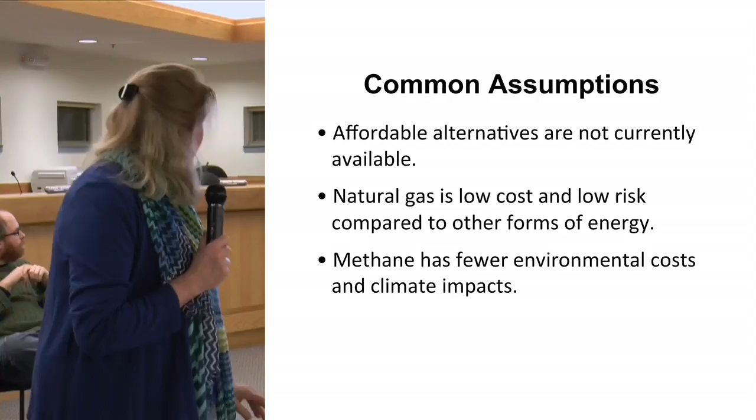We've noted a number of assumptions that tend to be made by the people who advocate in favor of the pipeline, and we've got them up here. They tend to believe that alternatives are not viable or affordable, available to people. And they note that methane has been the cheapest fossil fuel in recent years to buy, and they don't think it poses that big of a risk in terms of economic or environmental hazard. And they tend to believe that methane has lower environmental costs than other fossil fuels, especially coal.

So tonight we're going to mostly look at the first two assumptions, because our community hasn't had that much of an opportunity to learn about space heating alternatives, whereas, especially here in Dryden, you know all about the problems with fracking. So I'll turn it over to Bryce from here, and he'll walk us through his findings.

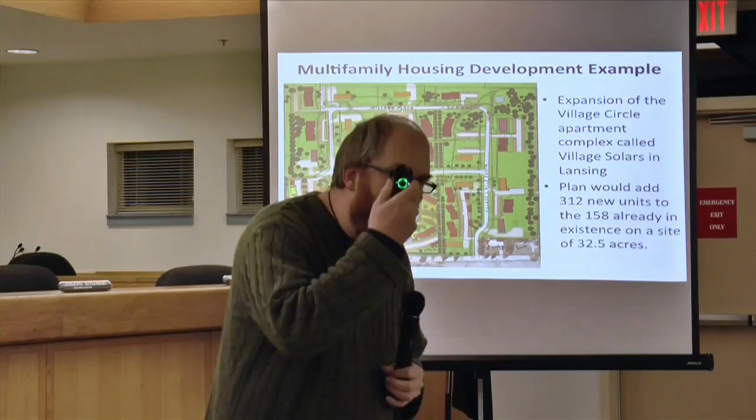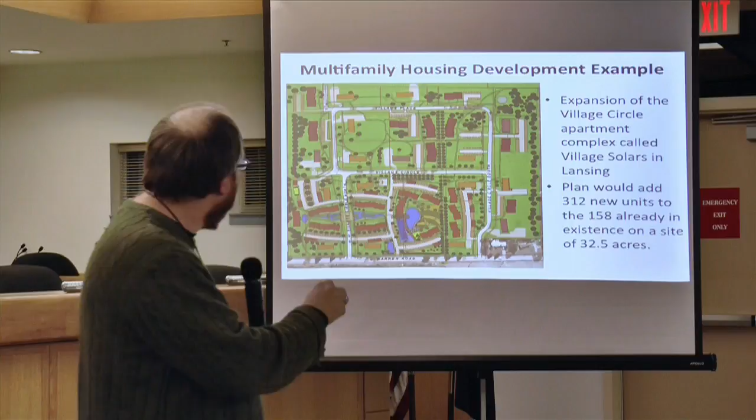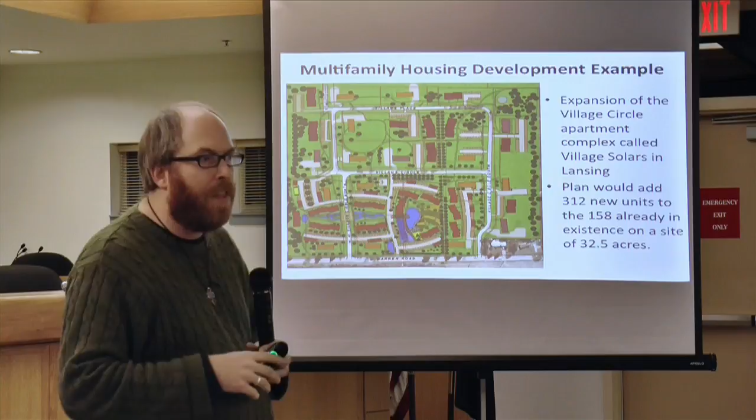So we took a project that was already in the pipeline: the Village Solars, an expansion of the Village Circle. The orange boxes are the existing housing units, the red boxes are what they're planning to add. This is a fairly large, fairly dense development: 312 new apartments to add to the 158 already there.

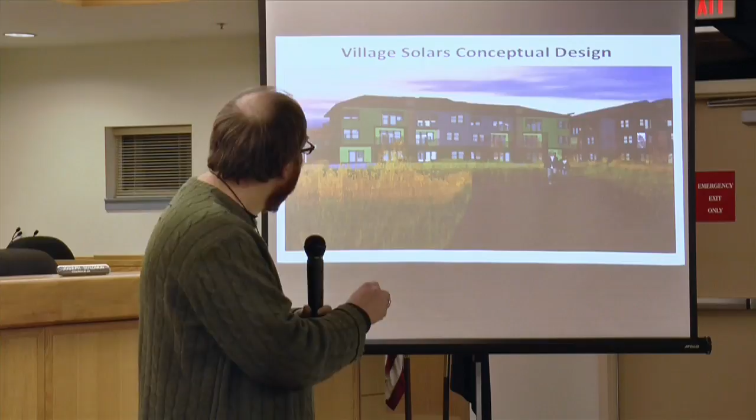We picked this one because there was enough information in the public domain that we could actually create the energy models and look at the options. Most of the units are constructed out of these little boxes: three stories tall, four units across, coming in blocks of 12 units repeated over and over to make the site. The analysis we're going to talk about tonight is really for one of these 12-unit blocks, then it's simply a whole bunch of those to make the site.

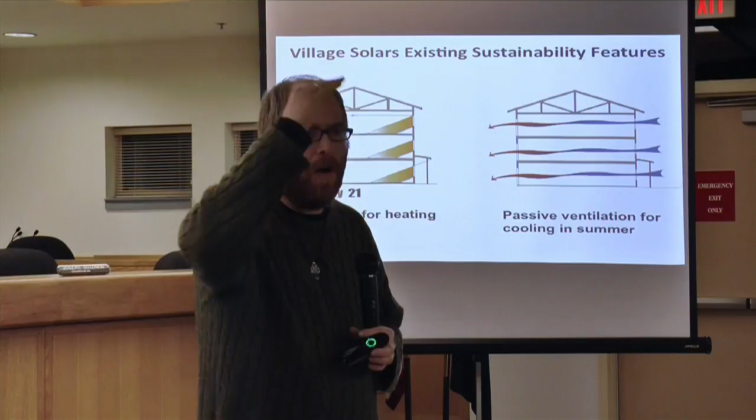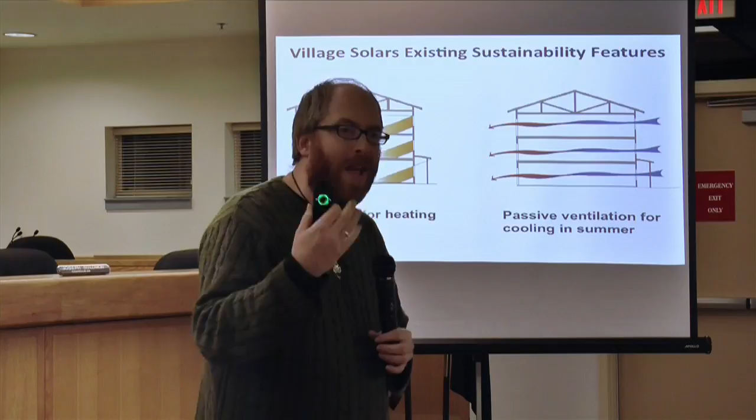It turns out Village Solars had already looked at a number of sustainability features, making it an interesting case study. Two in particular: they designed the buildings to take maximum use of solar heating in the wintertime, so they have solar gain in winter and awnings that block solar gain in summer. They also have glazing, or windows on the front and back, to create pass-through cooling in the summer. So it was already a design giving some thought to energy footprints.

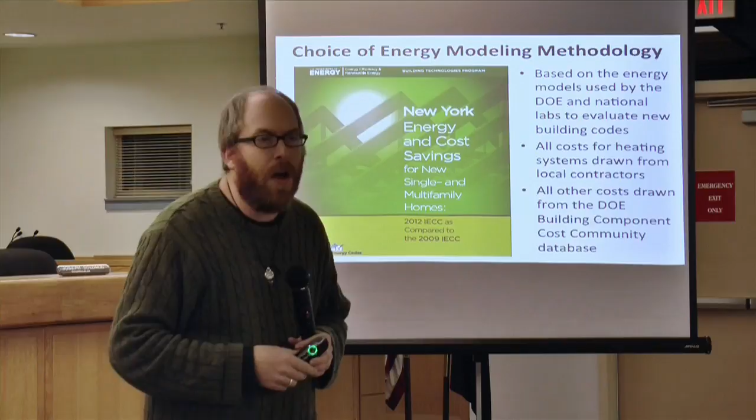What we wanted to look at was the options if, instead of building simply to code, you created a smarter building envelope and used one of the alternative-to-fossil-fuels heat pump technologies. To analyze this, we adopted a methodology that DOE uses whenever the energy code changes.

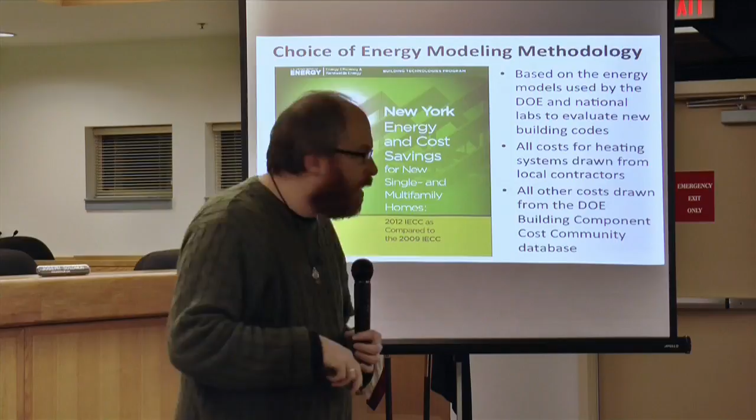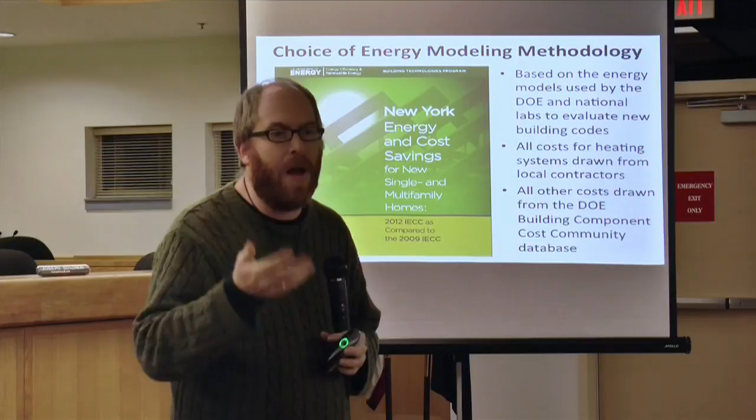This methodology is used all over the country, so it provides a nice base case. The other piece is that DOE maintains a cost database for all the technologies, so all the cost figures we used were verified common numbers. The only time we varied from the DOE numbers was for the actual heat pump installations, where we used local pricing since that can vary more greatly.

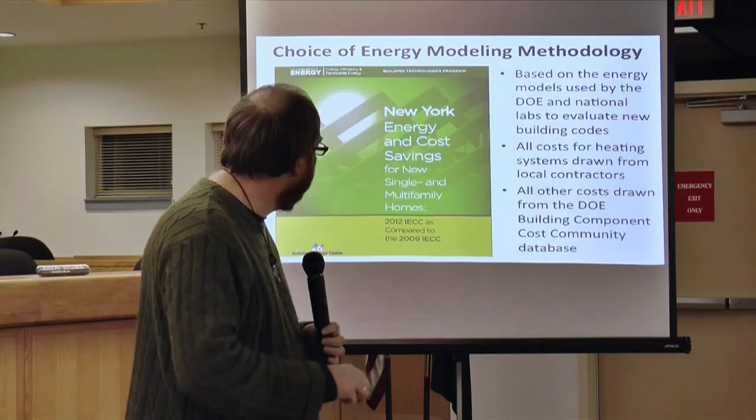We started out with the existing building code. At the time Village Solars was proposed, it was the 2009 building code, which is still what New York is using today. So this was our business as usual. When we started this work last fall, it looked like the 2012 building code was likely to be adopted, so we looked at that too.

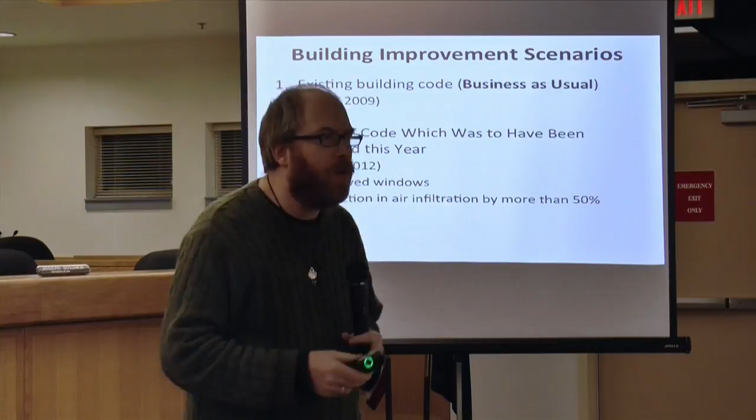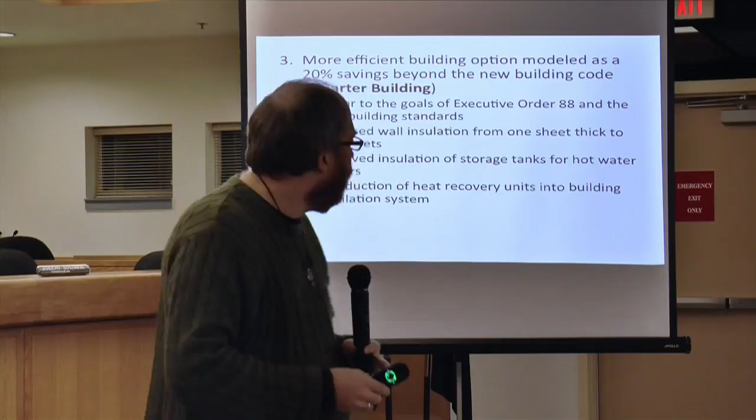But we also wanted to do better than simply building to the existing codes, so we looked at what was called a smarter energy building. As a goal, we took a 20% increase: a building that would be 20% more energy efficient than the 2012 energy code. The idea for 20% is that it's a commonly used number—for instance, LEED, the Green Building Certification, awards its first points for a 20% improvement off baseline.

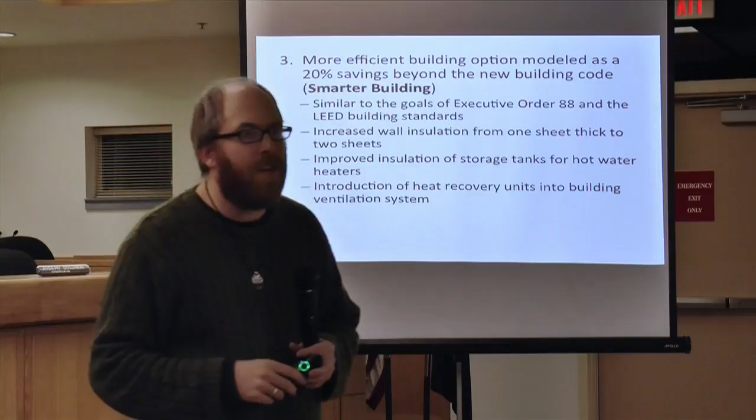Similarly, Executive Order 88 that Governor Cuomo issued called for a 20% reduction in energy use for all state-owned buildings. So 20% is our first number, and it turned out that to get that 20% we didn't have to adopt radical building technologies—it was simply three key changes. One was to double the thickness of the insulation.

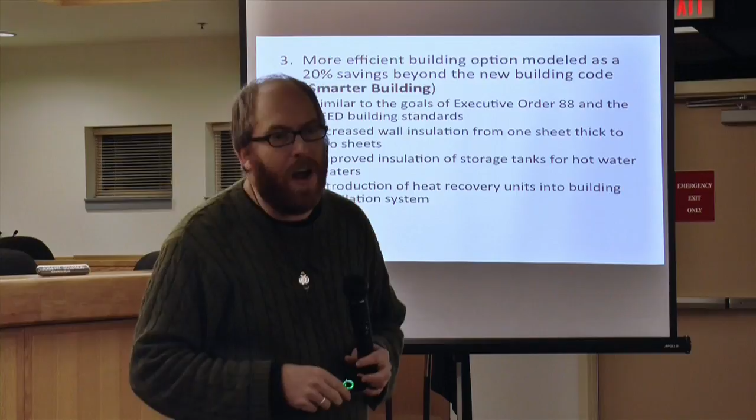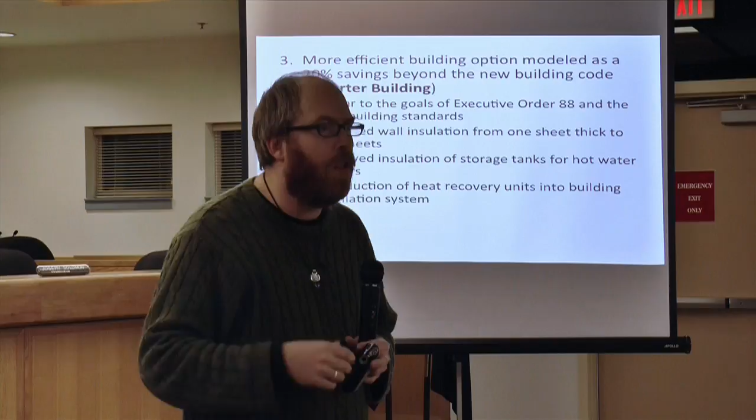So instead of one sheet of insulation on the outside, you put two sheets of insulation. The second improvement is to insulate your hot water tanks rather than leave them exposed. And the last one was to add heat recovery to the ventilation, which allows you to capture back some of the heat you'd otherwise lose when you vent the air out of your apartments.

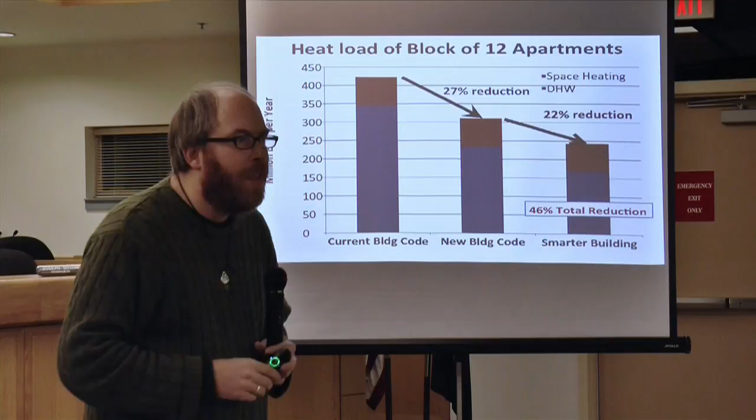So if we looked at the three models: business as usual, this was the current building code. If you were to build it to the 2012 code, you'd get about a 27% reduction, mostly through a tighter envelope. Our improvements off the building code, the smarter building, gave another 22% reduction. So all told, our building would use about half as much energy, a 46% reduction.

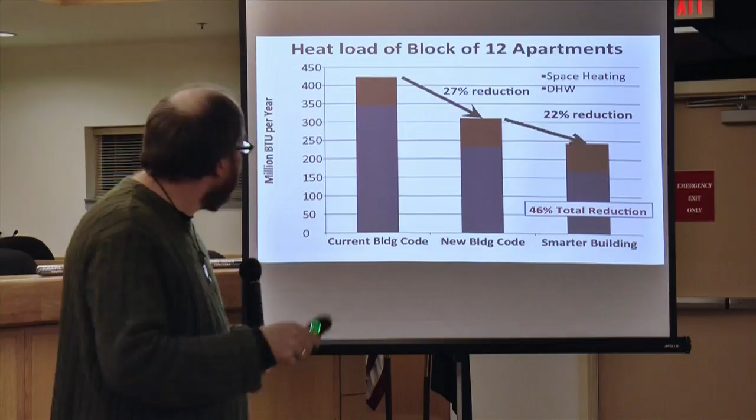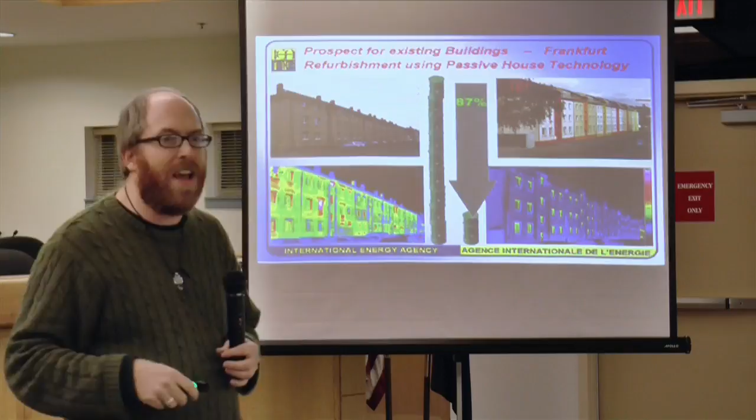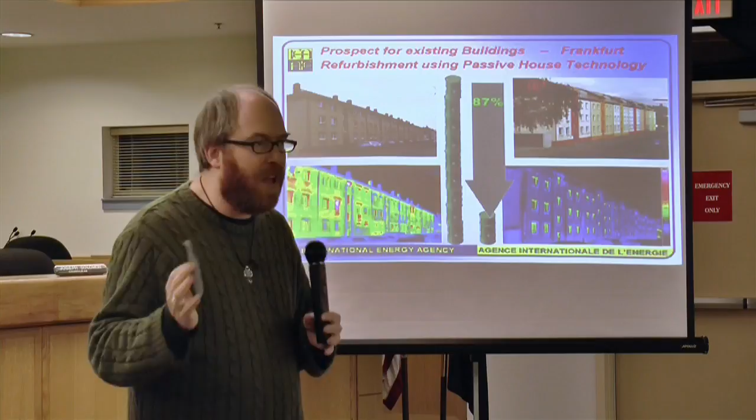So that's a big reduction, but to give you a sense that this isn't some radical best-possible building, I always love this slide. This is a retrofit out of Germany. These are infrared images before and after they fixed the envelope. After making these changes, they achieved an 87% reduction in the on-site energy use of the building. So our 46% is good, but this is not a passive house, not a really radical building design.

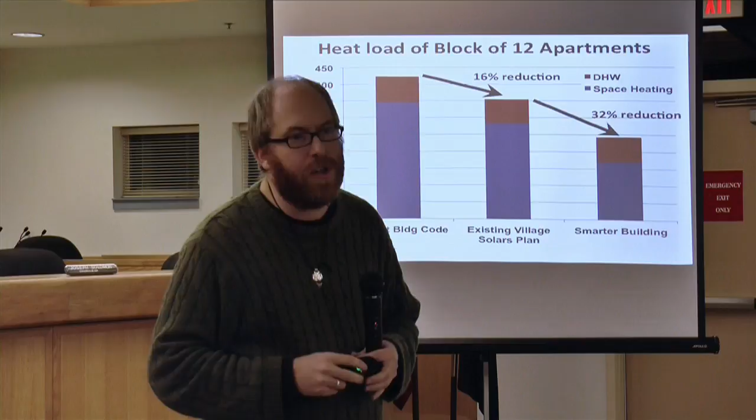Now, Village Solars, as I said, was already looking at some sustainability features and had an improved envelope, already better than the existing building code by about 16%. But our smarter building would still be about another third reduction from there. So there are still improvements we could recommend.

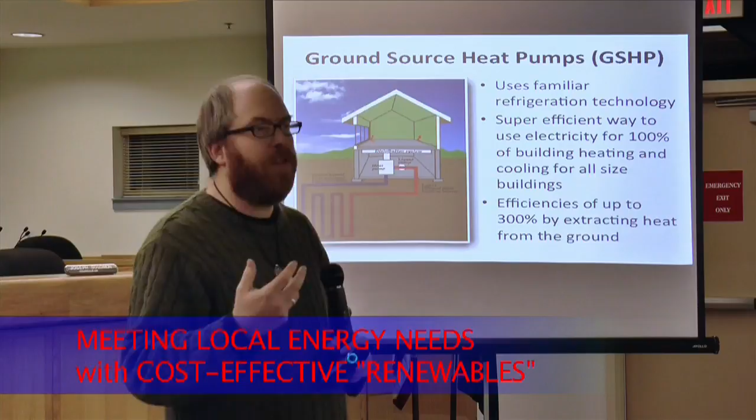In terms of the actual heating technologies, we focused on two that were very advanced and commercially available. The first is ground source heat pumps. These use the same refrigeration technology as a window air unit or your refrigerator at home, and allow you to extract 50-degree heat from the ground and uprate it to provide 100% of your building heat, really for any size building.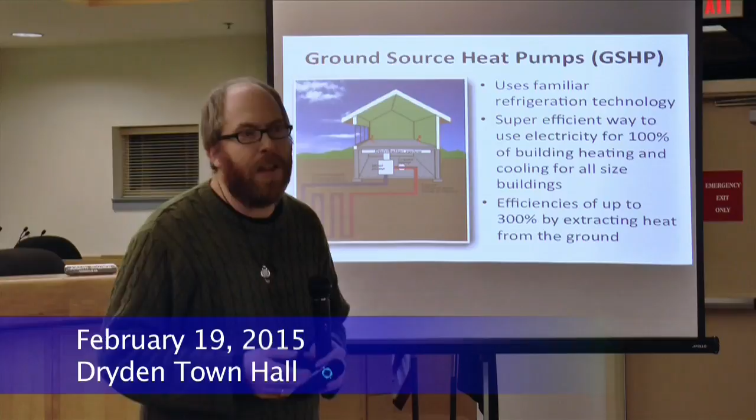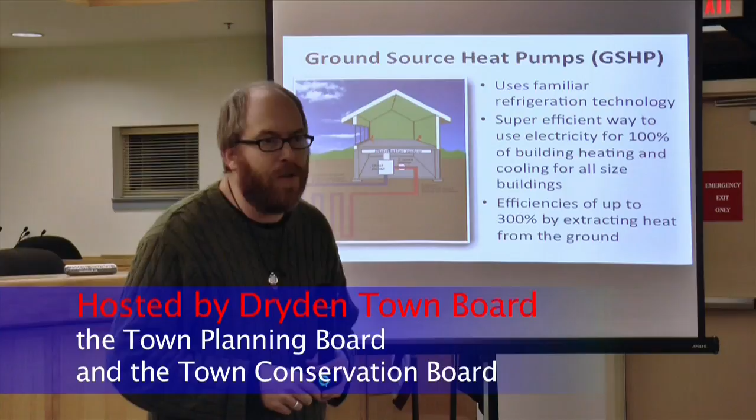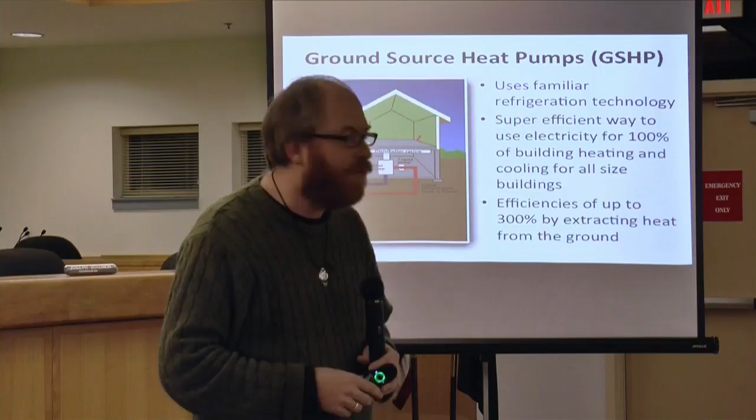For very large buildings or very large heat loads, economically you might start looking at other technologies like biomass, but geothermal can really heat any building—we'll show you a couple of very large buildings with geothermal in a bit. The last piece is, because you're using the ground to extract energy, for every unit of energy you put in to run the pumps and the heating system, your house gets three units of heat energy, so as an efficiency, we have 300% efficiency.

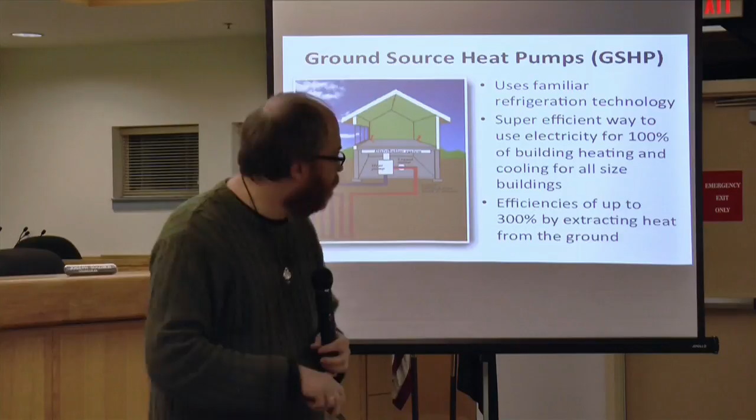So compare this to your natural gas furnace, which is around 95% efficient—95% of the energy you put in shows up. Here, 300% of the energy you put in shows up in your home, because the other energy is simply extracted free from the ground. The other technology we look at is air source heat pumps.

Air source heat pumps are very similar to ground source. They use the same refrigeration technology, only instead of extracting heat from 50-degree ground, you're extracting heat from the air in winter, and rejecting or dumping heat in the summer into that same hot air. So they're simply a little less efficient—instead of 300%, you have 200% efficiency.

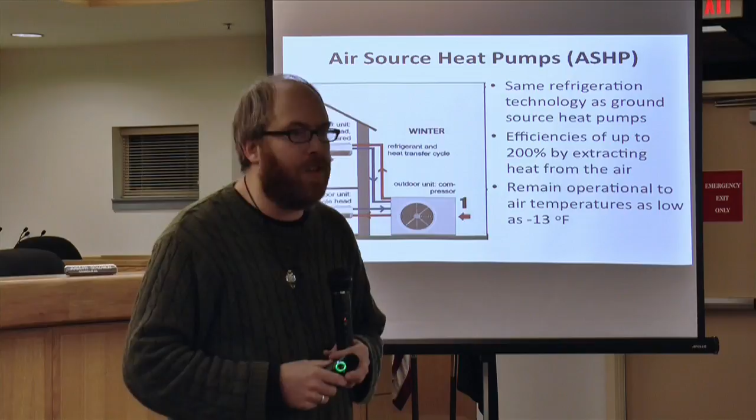And this technology has improved very dramatically. They now have models that can operate down to temperatures as low as -13, so they can really be used in our climate with quite a bit of certainty.

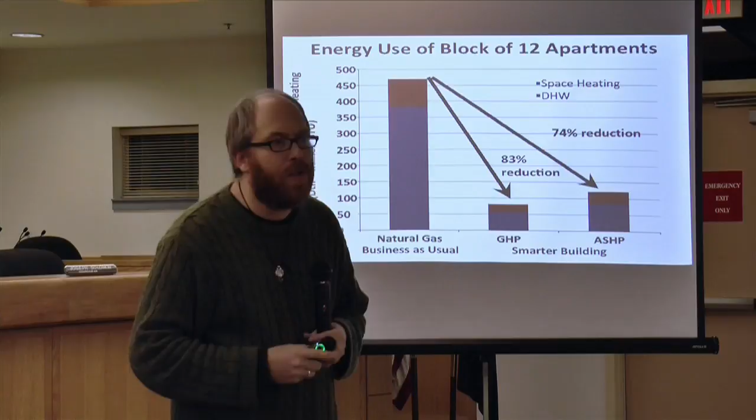When you combine those 200 or 300% efficiencies with our smarter building, here's where you get the really big reductions in overall on-site energy use. So here's our building as usual, using natural gas for heat. If you built it with the smarter envelope, the tighter building, and a heat pump, you can now see we eliminate 80% or 75% of the total energy. It's a huge change in on-site energy use.

And of course, this doesn't come for free. So the question now is, how does all the economics of this work out?

So what we wanted to look at was the upfront cost of building the smarter building and using the heat pump technologies. What does that look like as an investment? How much do you get when you look at the return from the energy savings?

Using those numbers from DOE for the cost of insulation and air sealing, and our cost for heat pumps, what we found is that for those 12 block unit apartments, it's about $50,000 to $60,000 of additional cost up front to build the smarter building. If you break that down per apartment, so you can compare it to things like granite countertops or other fancy bits you might put into an apartment, it's about $4,000 or $5,000 per unit additional cost.

So when we actually met with the architect who's designing this and talked with them about the cost of their building, what we found is it's about a 2.5% to 3% increase. It's a relatively modest increase, and we'll see that it's well below what we find and consistent with the national average.

But this investment is an investment. It's not simply a cost that you're going to bear. So the question for us was, what does it take to make this look attractive to a developer? How much do they have to recover in order to make this a return on their investment? So what we asked for was a 12% pre-tax rate of return.

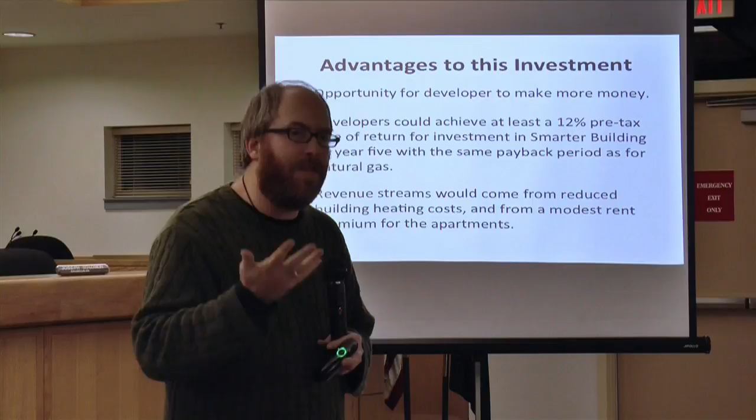Talking with developers, we saw that we would want to have this return in about 5 years, and they would want a cash flow positive after 6 months from the end of construction. So we built into our economics the question of meeting this type of return and meeting those cash flows.

And what we found was that it would require a relatively modest increase in the rent that you would charge. This is what we call our rent premium. Over the 30 years of the systems, you're going to save quite a bit of money on the energy costs. So you're saving $40,000 to $88,000 in energy costs.

So those energy savings are going to be part of this return. The remainder is a rent premium that you would pay to have these lower and more secure energy bills. And what we found is that the higher upfront cost of geothermal, because you have to dig the trench to put the ground loops in or drill the wells, ground source heat pumps cost a little more up front, but they're more efficient, so they have more savings over time.

And in the end, there really isn't a strong economic argument for one or the other. Both of them came out with a rent premium around $47. These apartments that we modeled, the Village Solars, are meant to be market rate apartments, so they were going to be rented for about $1,000 a month, and so this represents about a 4.5% increase in the overall rents.

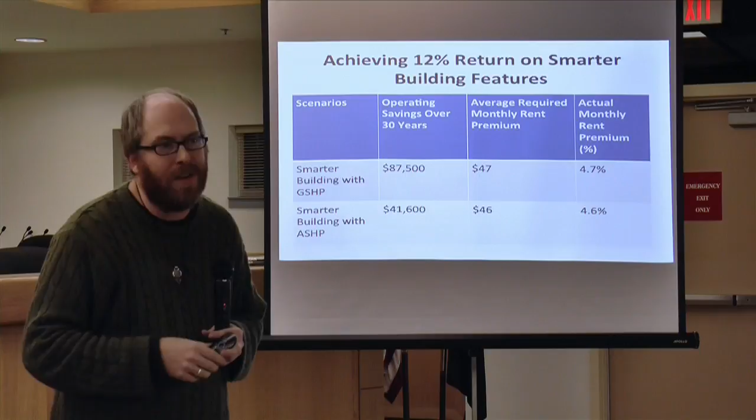Now this, of course, doesn't have to be the way that you work this, right? These were designed with existing structures that you were modifying the design, and they were meant to be market rate. When you want to look at affordable housing, there are examples in our area that have built more efficient buildings for less money than we're actually talking about the base price for these buildings. The base square foot cost is actually higher than what some green buildings have come in our area.

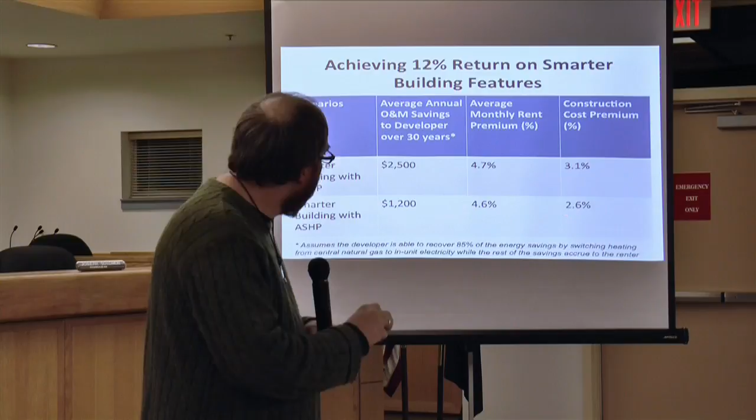So this was our totals. We had about a 4.5% increase in the rent, coming from about a 2.5% to 3% increase in the overall construction costs. The remainder is from the financing of this. And so the question was, could we expect developers to be able to recover these costs?

So the DOE has studied these types of buildings around the country, and far too much text they put on their slide that I copied here. But the numbers you want to focus on are the rent premiums, higher rental rates. And if you notice, the smallest rent premiums they found were around 7% to 8%. Remember, we would only need 4%, 4.5% to recover our costs.

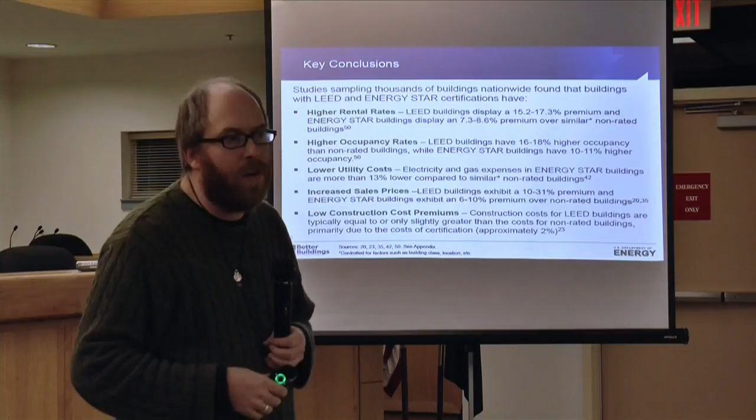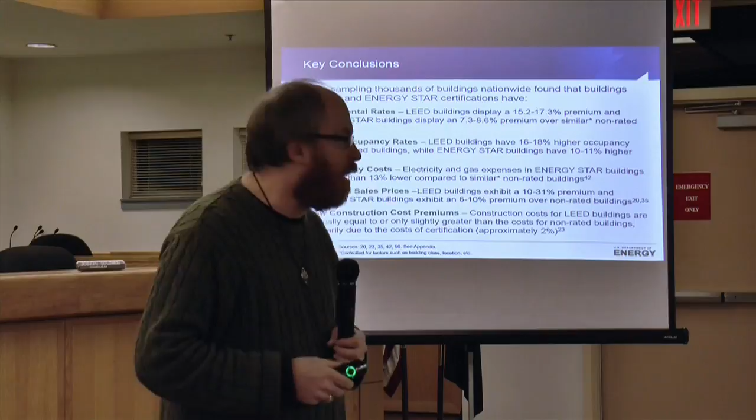They were finding LEED buildings commanding a premium of 15% or more. So these rent premiums are quite reasonable compared to what we see. And those rent premiums come from higher occupancies, lower utility costs, a faster and higher sale price. And then the last piece here is construction costs. They generally find an increase of around 2%, and that's consistent with what we found for our buildings, 2.5% to 3% increases.

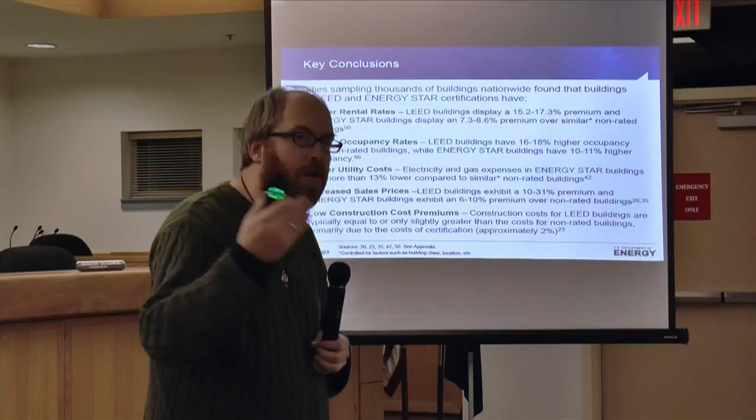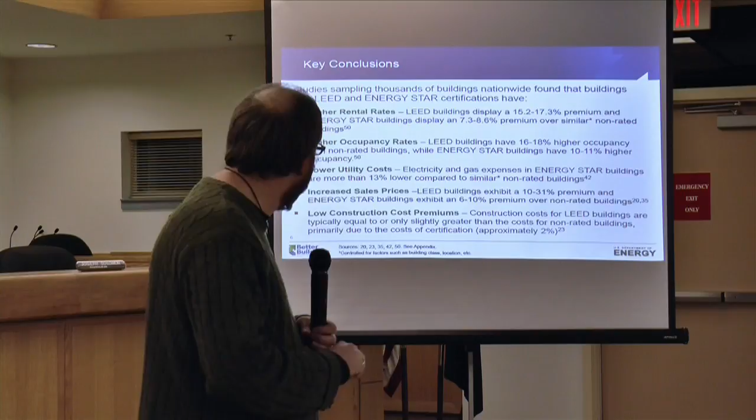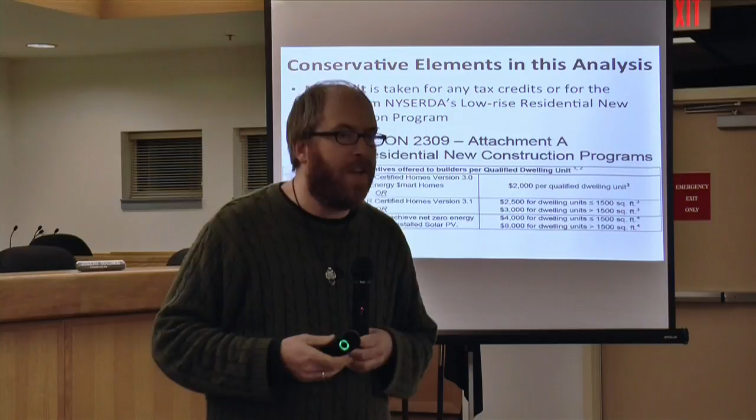So from the standpoint of a developer, this looks pretty good, right? There's a pretty strong economic argument that you could build the smarter building with the electric heat, the high-efficient electric heat, rather than the natural gas fossil fuel infrastructure, and you could make a return on this investment, a fairly healthy return. And in this, we have attempted to be as conservative as possible, keeping as many of the assumptions on our side as possible, so any changes would only make this look better.

So I'm going to hand this off to Melissa. She's going to walk you through some of those pieces and talk about where we've been fairly conservative in our analysis.

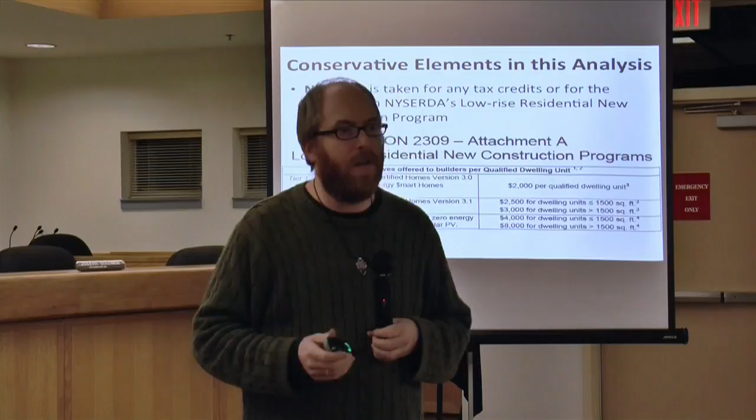Hey, thank you, Bryce. So just to continue and pick up where Bryce left off, this is a conservative analysis. The first thing that we show here is that we're not taking advantage of any tax credits.

Currently there is a very nice tax credit for building these type of smarter buildings. It's NYSERDA's low-rise residential new construction program. You can see, if I point at it, this top section here, it's about $2,000 per unit.

That they're willing to give developers for constructing these type of smarter apartments. So if you remember from the previous slide, to actually build the smarter building with a ground source or air source heat pump, we're talking about an additional cost of $4,000 to $5,000. If the developer wants to take advantage of this tax credit, immediately $2,000 of that goes away. So those economics in terms of developer profitability, that's without this involved at all.

This program's in place currently through the end of 2015. NYSERDA expects to continue it, extend it, and it's been successful and it's something they want to continue to promote. The other piece here is the third tier. There's also, they actually increase the incentive that you get if you do solar.

And that's why I'm up here to talk about solar. So solar PV, when it comes in the mix here, it actually increases that tax credit from $2,000 per apartment to $4,000 per apartment. And again, the additional cost was $4,000 to $5,000, so we're almost offsetting 100% of the developer's additional cost.

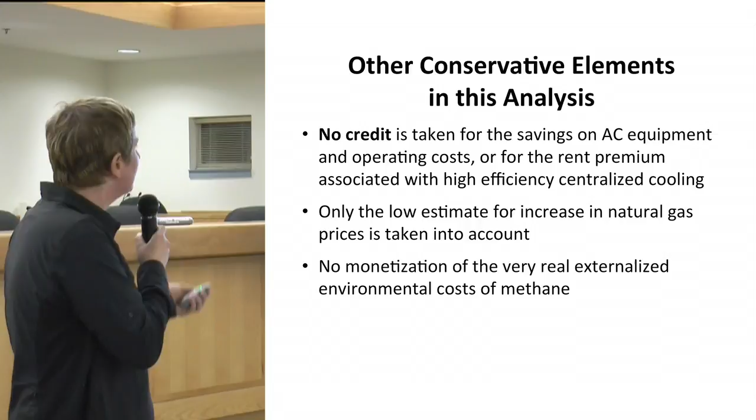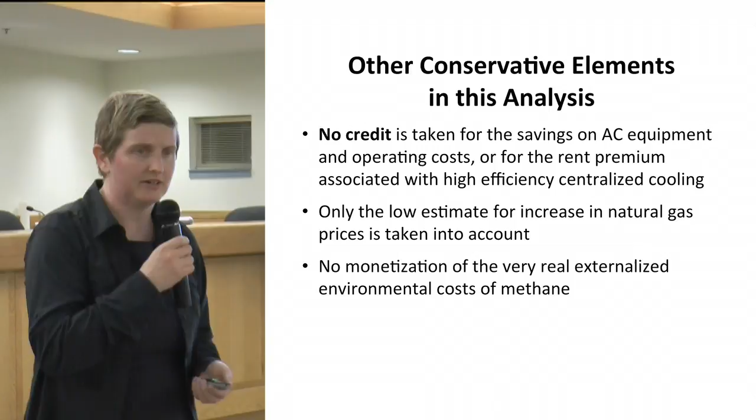We've also used very low base case costs for natural gas in the models he just showed. If we see higher prices, which we'll talk about later, that would only further improve the picture. And of course, many of you know about the fracking conversation over almost the last half decade.

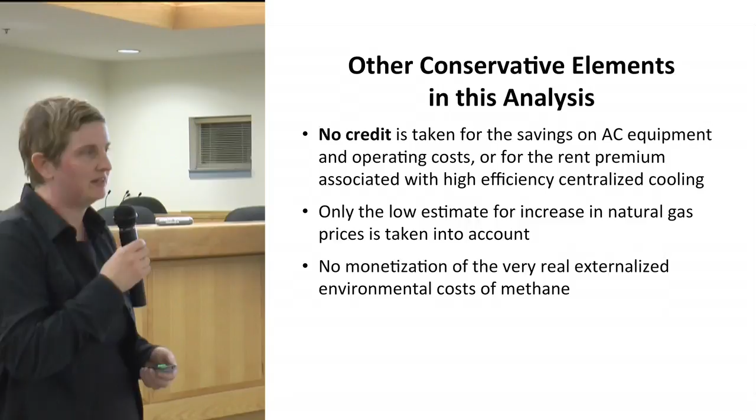Often we're here to talk about climate commitments, but we haven't put a dollar figure on that for this developer example and the economics we've shown. The real externalities that we're not currently monetizing do have a cost, and when you factor that in, it's icing on the cake, making this case even more compelling.

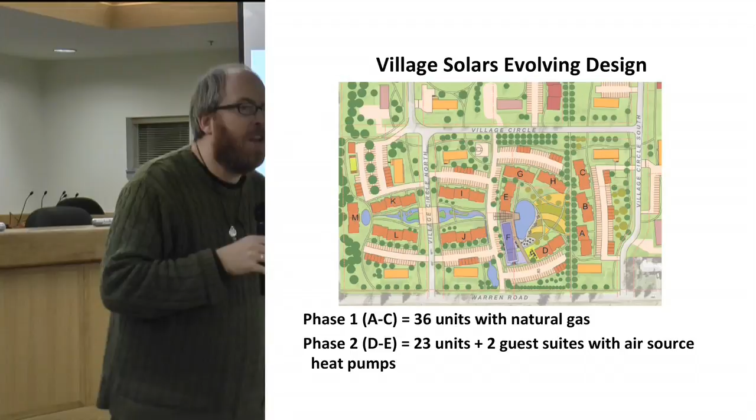As Linda mentioned at the beginning, when we ran through the numbers we think it's a fairly compelling case. But we're the eggheads, right? So you know it actually makes sense when the business people start putting the money down.

We did not pick Village Solars because of this, but as we worked with them, we found they had independently decided to switch at least phase 2 of their development to air source heat pumps. Phase 1, the first three buildings A, B, and C, are already under construction, nearly ready for occupation, and those will use natural gas.

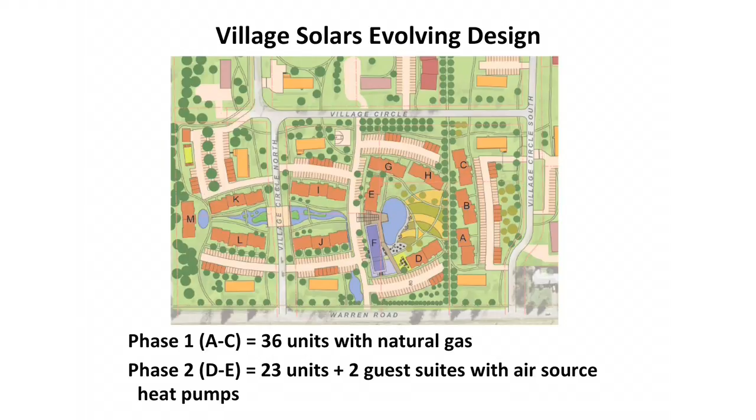Buildings D and E here are phase 2, and pending final work with NYSEG, they are going to switch these to air source heat pumps. The decision on the rest of the development is still being worked on.

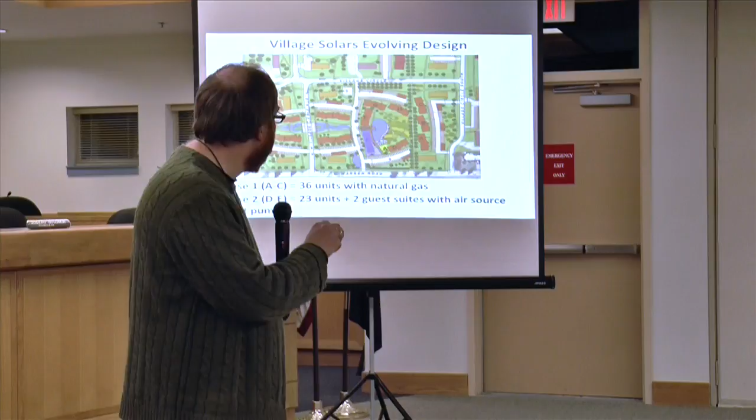Their decision came about because the developer had talked with other developers who used air source heat pumps and were very happy with them, and found that the economic arguments we're making here made sense for them too. This is actually going to be a remarkable case study, with buildings built identical to one another, some with gas and some with heat pumps, letting us see this work out in a really unique comparison.

Now, how this ties into the pipeline goes beyond just this one facility. Village Solars is a big user, and if all 312 apartments were built with natural gas, that's a lot of gas required. If they switch phases 2 through 5 away from natural gas to air source or ground source heat pumps, they'd displace the need for an awful lot of gas supply—enough to provide about 100,000 square feet of commercial space.

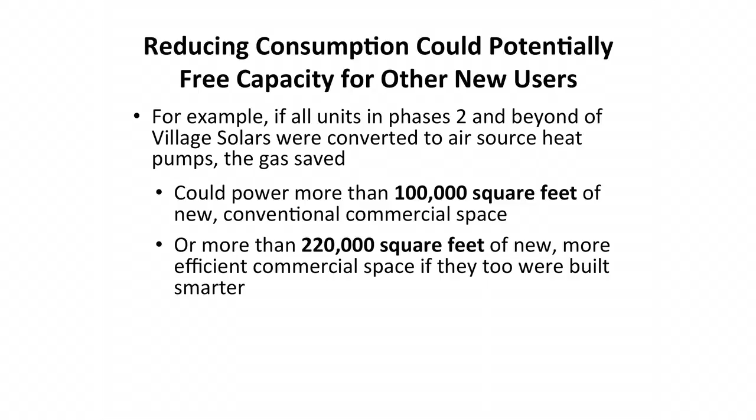If you built the commercial space better, with a smarter envelope, you'd be able to build almost 220,000 square feet of commercial space and power it with natural gas. This gives us a way where if big users make this switch and reduce increased demand for natural gas, it becomes a question of whether we really need to increase supply, or whether we can pull enough demand off the existing supply so users who really do need natural gas for high heat or process heat could still have access to it.

But we're taking natural gas and turning it to electricity, so the question is, do we have enough electricity? It turns out it's not a big amount. For all of those numbers, 2 through 5, if they build all of them with air source heat pumps, its peak demand would be around 135 kilowatts.

For those who don't live and breathe energy numbers, that's 0.2% of the average electric load in Tompkins County. And it turns out it's actually better than that, because our system is designed to meet the peak demand, and peak demand here comes in the summer still, and our new demand is adding winter demand.

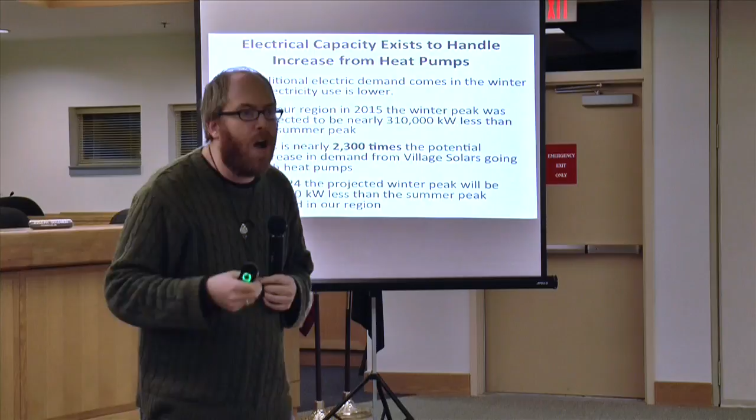So if you look at 2015 here, there's 310,000 kilowatts of excess capacity in our region because it's designed to meet the summer load and not the winter load. So that's 2,300 times what we need for the Village Solars project. It's a lot of excess capacity that our system already has. The transmission system needs to be considered, but we're not short of capacity.

And if you look to 2024, this is with the assumption that the Cayuga plant was shut down. These numbers are all built around the existing assumption that in 2017 Cayuga goes down and is not repowered. The actual winter excess capacity will still increase in our region. They project it to be 375,000. So there is quite a bit of excess winter capacity that we could tap into with these kind of technologies.

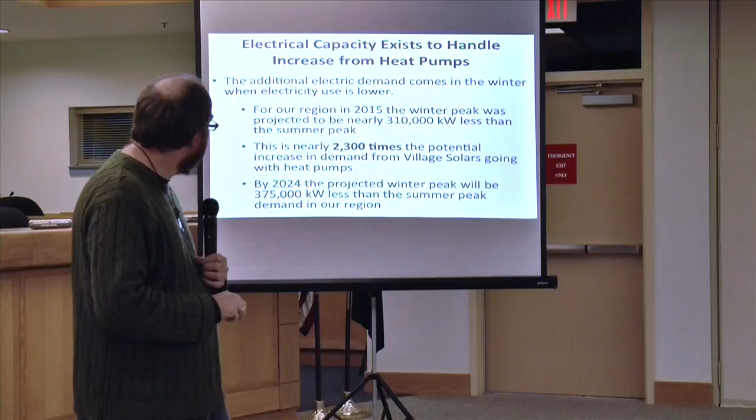And because we're talking about now not having a single contractor come in and put in natural gas, but we're talking about window companies and insulation companies and HVAC companies, all of that extra economic activity is going to mean more money in the local economy, and it's going to mean more jobs. So again, about $135,000 to $160,000 of extra money, and this is actually what would stay in our community.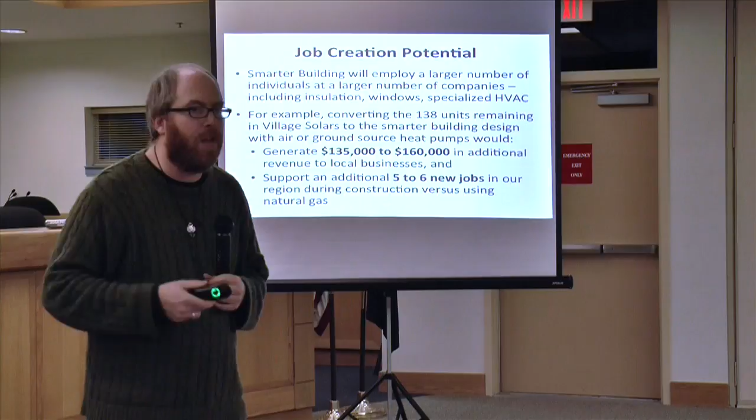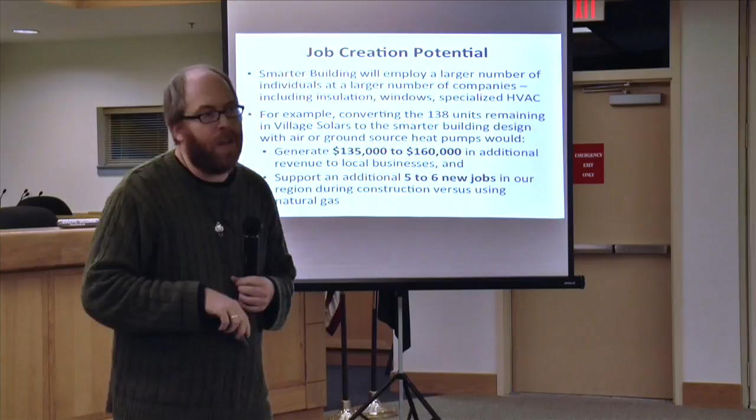So I've already taken into account the fact that if you buy a heat pump from a big national company, I'm not counting those dollars. Those are leaving our community. These are the ones that would stay behind, and it would add up to about 5 to 6 new jobs just from that one Village Solars project. So it is good for economic development.

So as Melissa mentioned, you can look at many of the same technologies for single-family homes, and again, the numbers will come out very similar. It's just now on a different scale. So if you were to build a new single-family home and your choice was, again, natural gas or building smarter with an air or ground source heat pump, there is an upfront cost.

For a home, it would be around $13,000 to $17,000 to build the home better. And if you financed that in your mortgage, it would work out to about $1 extra a month, or $14 extra a month.

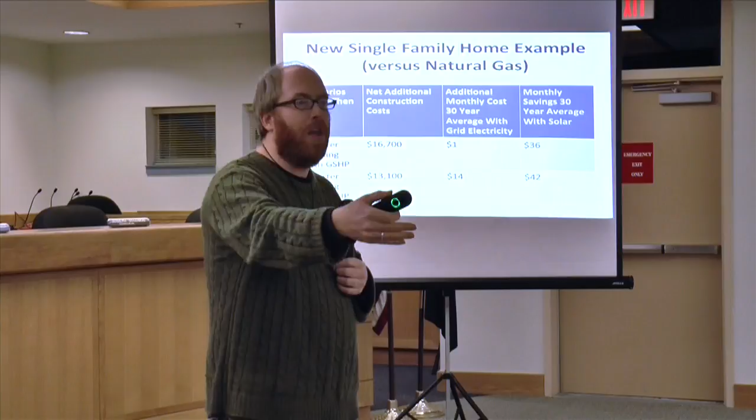But because of the advantages of solar, the fact that you can lock in that price today, make a loan for 10 years, and then the rest of the life of those solar panels, they're producing free electricity, you actually would end up saving money if you switched to solar. You'd save about $36 to $40 a month.

Similarly, if you're on propane now, and your choice was, do I convert to natural gas, or do I do insulation and air sealing and make a heat pump, the choice there, everybody's going to save you money. So switching to air and ground source heat pumps is going to cost you less than heating with propane. Switching to natural gas is going to cost you less. So the investment here would save you about $15 to $25 if you bought grid electricity.

And you'd save $60 to $75 if you switched and also installed solar at the same time. These are the average savings over the lifetime of the system. So you actually would end up saving a larger amount of money switching to a more efficient home with the air and ground source heat pump and solar. Not only would you now be fully net zero, you would have no fossil fuel infrastructure that you're using for building heating, but you would also save more than if you converted to natural gas.

So we'll just mention very briefly some commercial developments. These same technologies will work for us. Same basic technologies apply when we talk about commercial spaces. They're simply more varied, and therefore each case study would be a little bit different, whether it's a retail space, a hotel, or some other type of commercial space.

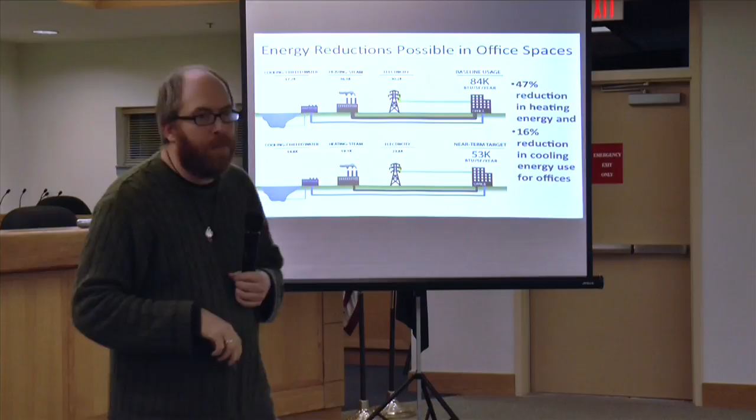So this is just cribbed from Cornell's study of their buildings. Office spaces, just like homes, can be built with better envelopes. And they found about the same types of reductions that they were hoping to achieve as we found for the multifamily, around 47% reductions.

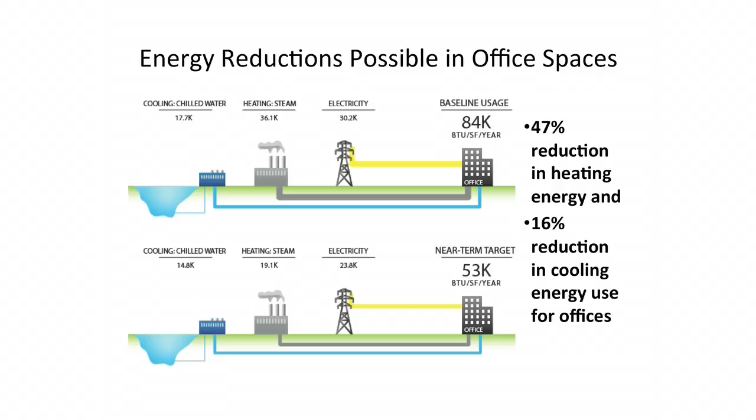Lots of buildings in the area have made this choice. Being from Cortland, I'm going to put the Cortland one up here first. This is the Professional Studies building, opened a few years back. The new part of the building here is powered by a heat pump. It's connected to an old building.

And this is a neat example of a really extensive retrofit. The old building it's attached to was not a high-efficiency building. It was, in fact, the Cortland Overhead Door Company at one point. It was where we stored our tractors after that. So this is a building that has had many lives and is now part of one of our newest spaces.

The well field, the geothermal, has 40 wells drilled about 350 feet into the ground. There's lots of space around these buildings because there's lots of parking lots. They just simply drilled it under the parking lot and repaved over the top of it.

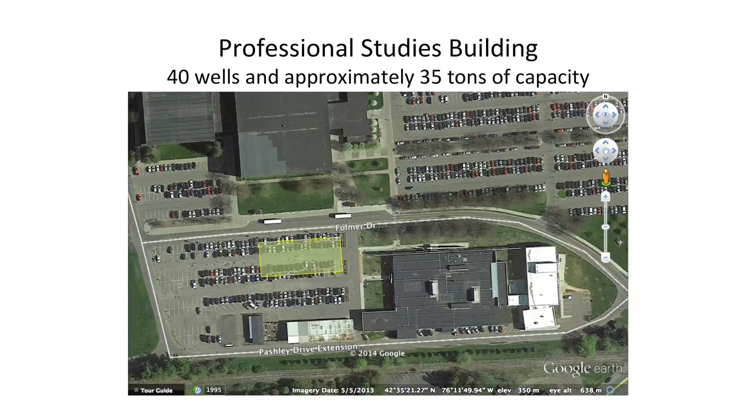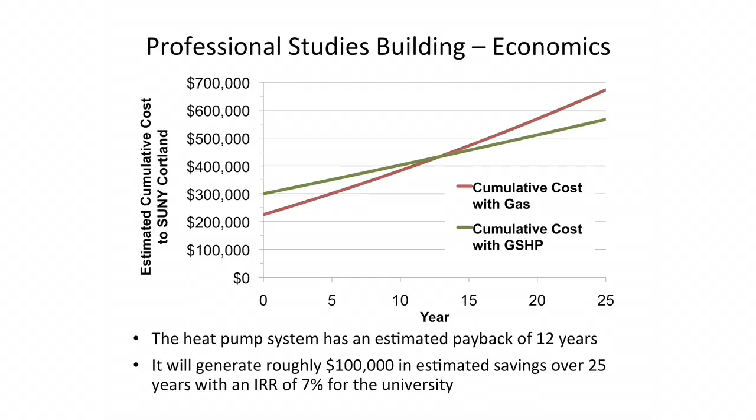Because this was part of a large project, we don't have individual cost numbers the way we would for some projects, but this represents our best estimate as to what the excess cost of the geothermal was. So the green line is our cost here. It's a little higher in year 0 because we cost a little more, but over time, the fact that it's going to use less energy and use electricity is going to save us money. We expect about $100,000 in utility savings, 12-year payback, and the university will make about a 7% return on this investment. So we will make a fair amount of savings from this piece.

We're, of course, not the only ones that made this switch. This is the Peggy Ryan Williams Center, the administration building up at Ithaca College. It's a big building, 57,000 square feet, powered by the heat pump there. It's about 30% larger in terms of the heat pump capacity than SUNY Cortland's.

Big heat pumps, you will sometimes hear stories about them. Like any technology, you've got to commission these well. SUNY Cortland's system ran for a while, wasn't producing very much until someone looked at it and found that they hadn't filled our glycol loops. They hadn't actually filled the well field all the way, so it wasn't producing.

Others on this list, Argos Inn, had some decorative covers placed over the tops of their heat pumps, obstructing the airflow, so the efficiency wasn't there. Those were found and fixed. Lansing had a system that was working, then they changed the distribution system, and the engineer hadn't taken into account some of the special things you have to do with heat pumps, and therefore the new distribution system created some difficulties. So with any of these technologies, care has to be taken with commissioning so that they run correctly.

And when that's done, these systems do work very, very well. Our system is up and running now and has performed the way we expect it to.

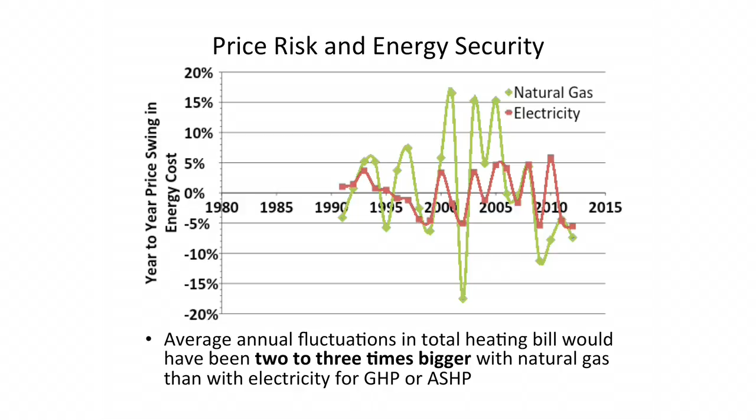So the last thing I'll mention here is just the economic risks that Gay had started with. If we look at the history here, the last two decades of prices, what you find is electricity has been less volatile. The red line is electricity, the green line is natural gas prices. From a developer's standpoint, where developers are paying those bills, these big year-to-year swings in the cost of natural gas are troublesome.

Those create unexpected amounts of cost in some years and not in others. Electricity is a more stable price. Not only that, we're using less energy, so when you combine the two, the year-to-year swings would be about 2 to 3 times less. It's a much more stable energy price.

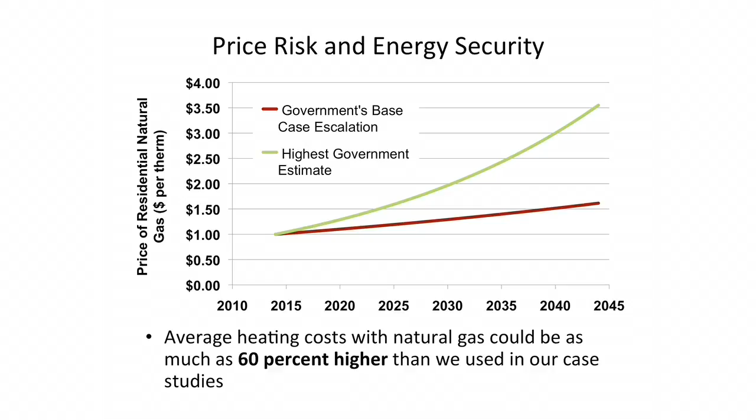Over the next 30 years, there's about a 60% increase in cost if you follow that top line versus the bottom line. So when you talk about energy security, that price wedge as we go forward becomes bigger and bigger. As we like to say, natural gas is energy familiarity, perhaps, more than energy security.

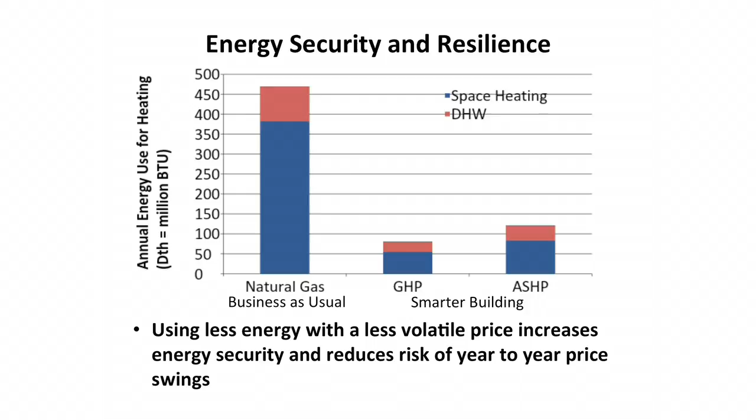And the best way is to use less energy, right? The best kilowatt hour, the best BTU is the one you never actually put into your building. So having these much smaller on-site uses of energy is going to give us much more stable prices and much more stable systems going forward.